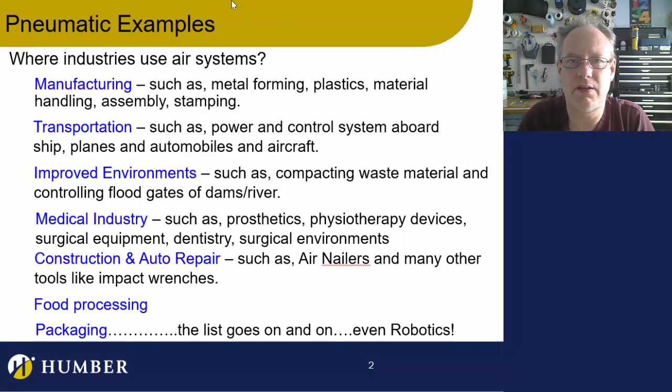When we have precious environments, like situations where we're packaging food or special chemicals, we don't want an environment where we're going to add grease or electric shocks. We don't want to use electricity, anything with grease, or any motor that needs a bearing. Well, a lot of things need bearings, whether they have pneumatics or not. But often for purity, we use pneumatic systems for packaging special materials like food and chemicals or pharmaceuticals. So as we go on, you'll start to really realize how cool air is and how unique pneumatic actuators are, and why we can use them in certain places where we may not use other ones.

For instance, I remember years ago, way back when we got the compressor out, we were at the cottage drilling holes through the beams under the water. I went down there with an actual drill that ran on air. We had the compressor up on the shore. I didn't want to run an electric drill under the water, especially one that plugged into the wall. But air, no problem. It worked, and all we had to do was re-oil it, and then it just continued to work fine. So there's an environment underwater where we can use air.

Pretty cool. So what's going on is I need to get into a little bit of the physics of how all of this works, and we'll talk about gases and the dynamics. There's the physics word popping into this, and yeah, we will actually be studying physics - the physics of air as we go through this entire course.

So we know what a solid is. It's got really strong interactive forces, so those molecules are bound together, stuck together. Now when we get into liquids, those molecules are also a lot closer together, but with a little bit weaker interaction. What happens is when we get beyond the fluid into the gaseous state, those van der Waals forces break down. Some of you may know what that is - don't worry, I'm not going to quiz you on what that means. But essentially, it's the molecular forces between the molecules.

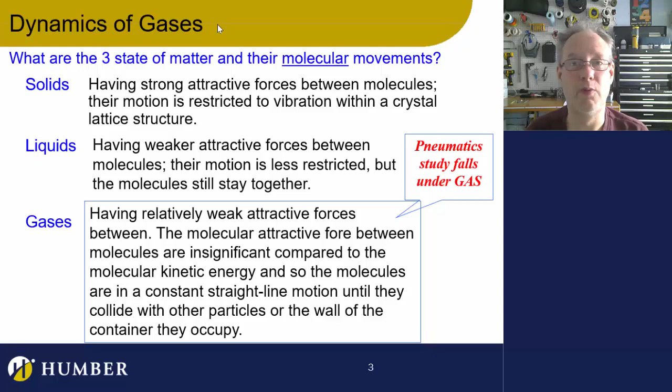Okay, let's move on. If we take a look at what an ideal gas is, an ideal gas is somewhere kind of beyond the solid that a gas is - actually, let me go back. Let me not even say that.

I'll pretend I didn't say that, although I'll kind of mention that again in a minute.

Let's talk about what an ideal gas is. An ideal gas is a situation where we have a gas in a closed container. If we don't have a closed container, we can't apply the laws that have been established for air. The physics, the rules, laws and formulas we use for gas are different than those we use for liquids or solids. But those formulas don't work unless all of that gas is stuck within a single container, enclosed.

To some small degree we can still use those laws in, let's say, a room. Like the room I'm in, there's a little air leaking through the door and window, the whole place isn't hermetically sealed. The gas laws still apply to a small degree, but ultimately the air in this room is not an ideal gas. If I were to hermetically seal this room perfectly, it would be an ideal gas. So an ideal gas is essentially a gas that's completely closed in some kind of environment, plus it's not completely compressed, more like a solid.

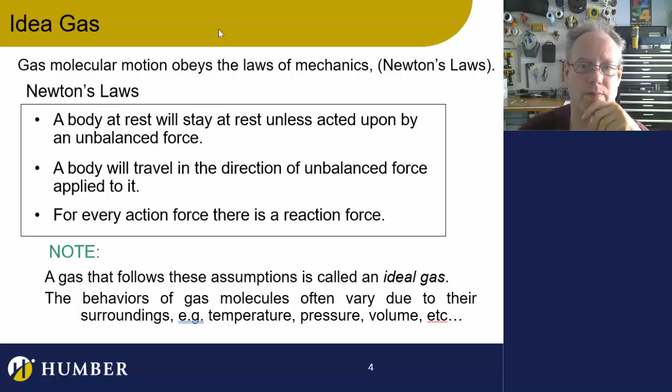What we've got here is the atmosphere. I want to talk about the atmosphere and atmospheric pressure, which you know about. What's actually the atmosphere? Essentially there are all these different levels of the atmosphere, and weather occurs way down at the bottom. As soon as we go above the weather zone, out of the troposphere, which is where the weather still exists...

Out of that we get into the stratosphere, which is getting closer to space, and as we go higher and higher we're eventually out into space, into the exosphere. It's interesting - even if you were to go out to the 100-kilometer limit, there's still a little bit of air out there. It's so thin, but it's still called an atmosphere. So there are all these different levels of atmosphere.

We're not really going to get into the details, but the only thing I need you to get from this is that as we go further and further up, the gas gets thinner and thinner. We'll talk about that in a couple slides when we unpack what atmospheric pressure is. Let's continue on.

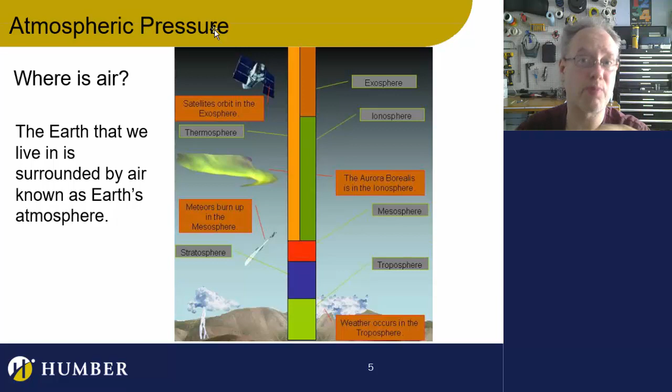So now, this is cool. I don't know if you guys knew this or not, but 78% of the air is nitrogen. Nitrogen's inert, you can breathe it. Obviously, I'm breathing it right now, and so are you. We're all breathing nitrogen. Now, nitrogen's got a little oxygen in it, right? So the oxygen is 21%. I think you guys know that generally the atmosphere has got about 21% oxygen in it.

Now, this is all at sea level. As soon as you start going way up, not only does the atmosphere get thinner and thinner, but the composition to some degree changes because of the buoyancy of these different gases. This is something we don't really need to deal with or know, because essentially we're going to be dealing with these ideal gases.

We're going to be dealing with pressures and systems that are generally on the Earth. We may be dealing with airplanes and stuff that go up into the air, and at some point we may discuss what the pressure systems may be in, say, the International Space Station. But essentially, there's still pressurized air in there. So whenever we're down near the surface of the Earth, we're dealing with pressurized air, and generally that pressurized air is going to sit in this ratio here.

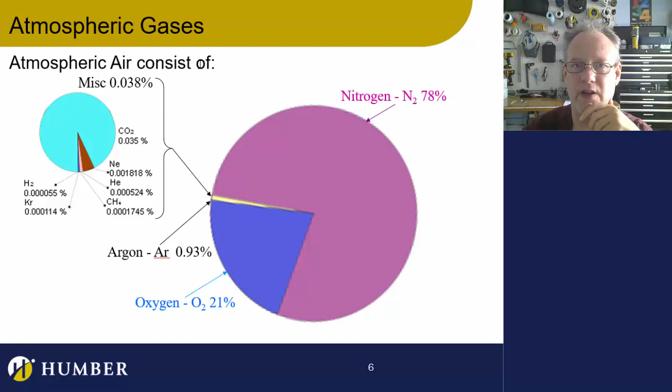It's going to be 78 to 21, and there are all these other little tiny things in between. But essentially, I just need you to get an understanding of what this looks like - what's the stuff that we're breathing, that we're living in, that we actually take and compress and do mechanical work with. So right now I just want a little bit of history of what's going on here.

The word pneuma, or pneumatics - like dynamics, kinematics, right, this is the study of motion. So essentially, pneuma is the Greek word for breath, and in some cases it's actually used for spirit, like the air or whatever. So pneuma is the Greek word or the definition of breath itself, and then we get into pneumatics. It's essentially pneumodynamics - the dynamics of air.

Okay, so that's fine. I like the word pneumodynamics, and I think it's actually a better name than pneumatics, because I like the word dynamics - it really talks about studying the physics of air, or breath, pneuma, right? Okay, so we know it's a branch of science that deals with the transmission of energy using gas.

Now, it's interesting, I'm just going to pause here for a second. Are we studying the transmission of energy? Well, yeah. What kind of energy? Actually, mechanical energy, truly. We're not going to be studying levers and stuff, but you'll see there's a parallel between some of the formulas we're going to study and the lever formula, and some other mechanical type formulas can kind of be seen in pneumatics to some degree. It's pretty cool - we're actually transmitting mechanical power.

So anywhere we're transmitting force through air, it's called pneumatics, because it's a dynamic of pneumo. So pneumodynamics - there you go.

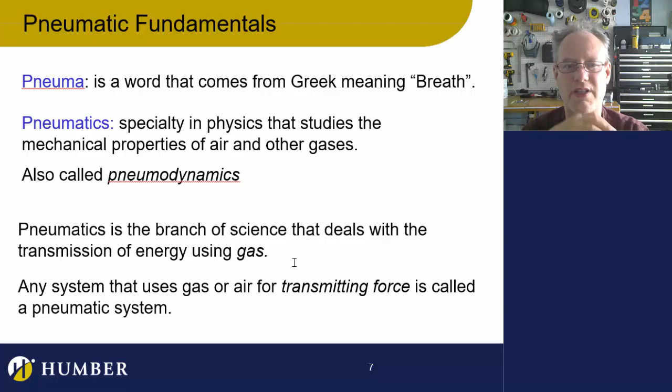So essentially what's going on is that we need to talk about two kinds of air. I've already talked about one kind of air - the atmosphere. I've said there's a particular kind of compartmentalization of that atmosphere where we have a certain amount of oxygen, a certain amount of nitrogen, a little argon, and a bunch of other things. Okay, so generally all of the air we're going to study is going to be like that.

Now, if I wanted to, I could apply the same rules, the same laws, the same math, the same physics, everything we're going to talk about with any other gas. I could use pure hydrogen, or, well, maybe I wouldn't want to deal with pure hydrogen, but certainly pure nitrogen or pure argon or any kind of inert gas, helium, stuff like that. So, but we're going to be generally dealing with pure pneumatic systems that are compressing air from the atmosphere. So as soon as we compress it, it turns from free air into compressed air.

Free air is just this, right? It's just this stuff here, that we're breathing, we're interacting with, we're walking through it.

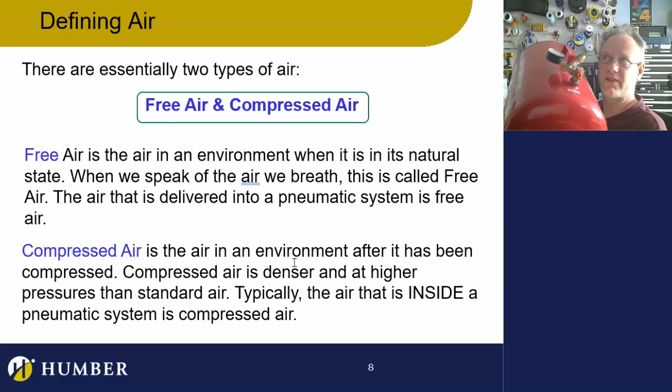As I'm moving my hands like this, I can feel the air. As I'm doing that, that's called free air. As soon as we compress it and shove it in a tank and capture it, so the density of the air in here, if it was compressed, would be greater than the density of air outside the tank. So I'm shoving more and more air in there. Actually, we can't make compressed air without an ideal gas, without that enclosed container.

So as soon as we compress it, it's no longer free air, it's compressed air. Again, it's got to be an ideal gas, it's got to be inside a container. And it's denser, so the density of that air in that tank is greater than the density outside the tank.

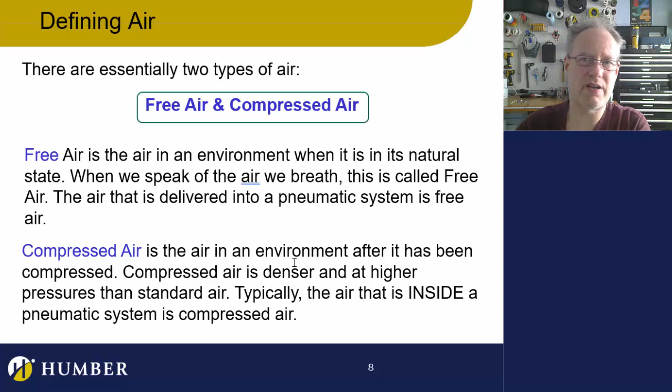Actually, I'll tell you this, if you really think about it, the atmospheric air, that's an interesting one. The atmospheric air is pressurized. Does it make sense? I mean, think about it. The atmospheric air is pressurized. Okay, why is it pressurized? Well, hold on to that thought. Let's just continue a little bit here.

So free air can actually be any temperature or any pressure and have any humidity, whatever. So we're going to talk about not just free air and compressed air, but we're going to get into defining what compressed air is, and maybe there are different terms for compressed air. But right now, let's just talk about this air that's sitting here.

So free air can be any temperature, any pressure, any humidity, whatever it is, it's called free air. Free air doesn't mean it's defined as anything. It doesn't have to be 21% oxygen and 78% nitrogen. It doesn't have to have a certain humidity. It doesn't have to have a certain pressure. It can be really low pressure. Actually, you could go up a mountain, way, way high, and the air pressure up there is really low, but it's still free air.

When we talk about standard air, we kind of have to put some values to it, because when we start to do the physics, we're assuming we're going to put free air into this tank. I'm going to compress air and put it in here. I have to kind of have a ballpark number for my physics, so I'm going to start with what I call standard air.

Now, standard air is just general. If you get really specific and you want exactly standard air, then it has to be exactly 14.7 pounds per square inch. And it also has to be exactly 68 degrees, or 20 degrees Celsius, and it has to be 36% relative humidity, exactly. So that's actually what standard air is.

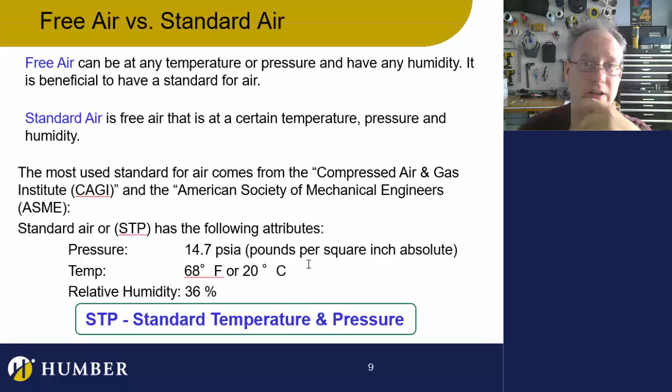Now, if you're in the desert, down in Death Valley, well, it's not actually standard pressure, but generally you're going to still use the same formulas. If you're up in Alberta somewhere 1,000 feet up, you're going to use the same formulas, but it's not exactly standard air. And if it's winter or summer, it's not going to exactly be standard air. But generally, it's something that we talk about as the type of air we use when doing the math for compressing. If we get into really specialized situations, like going up in an airplane or way up the top of a mountain, then we're not dealing with standard air, and the formulas change a little bit, but generally they're still pretty much the same. But right now we're just going to say, when we're talking about compressed air, we're talking about standard air, standard temperature and pressure, even though it's not exactly that, but we're just going to roll with that.

Now, as far as the compression of gas goes, taking a look at the history of this, we've got this cool concept of the bellows. I'm not sure if you've used a bellows, but I remember when I was a kid, we had one by the fireplace. You're actually kind of capturing the air inside and you're compressing it to some degree. It has a vent, it can come out, right?

So we're actually creating pressurized air. Now, the pressurized air inside that bellow, as I'm squeezing it down, there's a little bit of back force from all of it going out the nozzle. So there is some pressure generated inside, but generally the air that's in there is still not considered an ideal gas. So I'm not really dealing with an ideal gas, but we're talking about the history of pneumatics. At the beginning, blowguns go way, way back. But the bellow itself goes back hundreds and hundreds of years. So they weren't dealing with an ideal gas. It was pretty close. In this situation, we are actually compressing air to some degree in here, but it's coming out of the nozzle.

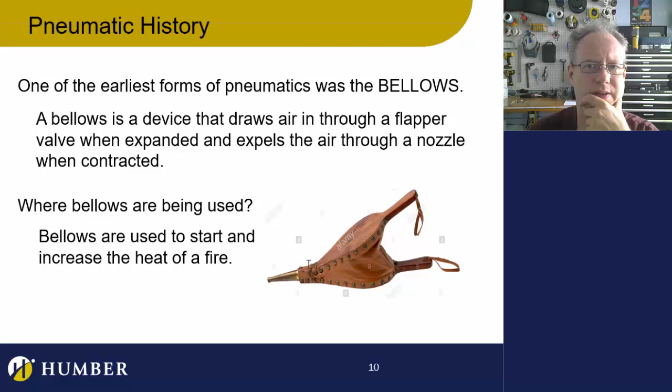But that was really the first compressor that we can think of. Now, if we go way back, blowguns were used way, way back when. They're compressing gas as well. Again, not dealing with an exact ideal gas, but still working with the ideas of pressurized gas. In this case, this is probably the first thing of pure mechanical transmission, or pneumodynamics. Pretty cool, because you're making a projectile go, right? So there's definitely pneumodynamics going on here. So it was pretty cool, actually.

It goes way back to the late 1800s, where France installed this huge compressor. I think it had to do with the water system in France. So they were pressurizing the water system to make it go around. But one of the things I do know about, which is pretty cool, which I'll show you a picture of...

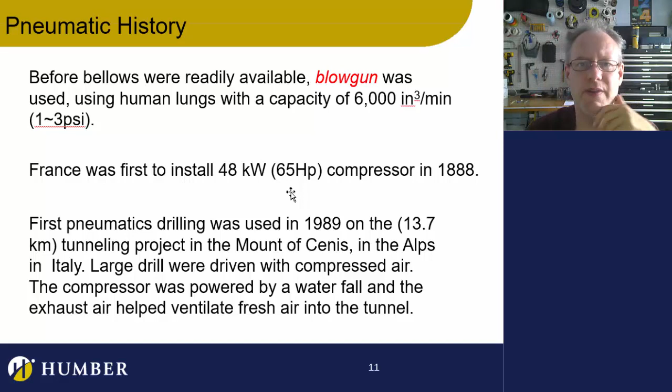...was the first pneumatic drilling, used way back when in Italy, when they were making this huge, I think 13.7-kilometer tunnel. It goes way into the mountains. It's pretty cool. What they did was, a gentleman designed this pneumatic drill. And I'll show you a picture of it.

So pneumatics, or pneumodynamics, like actual pneumatic systems doing mechanical work for us, have been around for a long time. It's pretty cool, going back to a little bit of the mechanical physics here. What they were doing is they were using waterfalls. Actually, there was a waterfall at either end of the tunnel. They were boring both ways, but there was a waterfall at one end, and the water falling, they used that to generate pressurized gas. So we're taking mechanical motion, turning it into more potential mechanical motion, pressurizing gas, and then having that go move drills. So it's pretty cool.

Ultimately, they were drilling the hole with water, but they were just transmitting the power, drilling this tunnel with the power of water, transmitting the mechanical force through pressurized air, or pneumodynamics. Super cool.

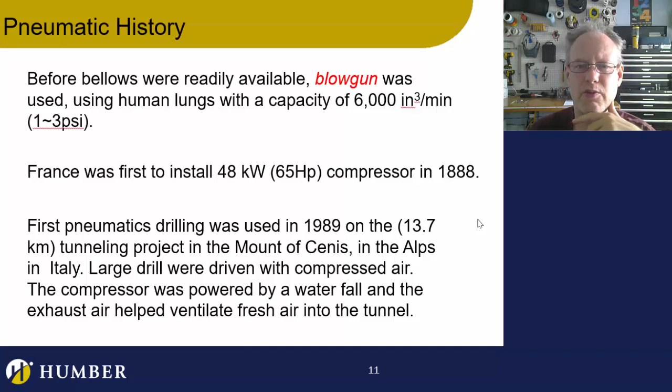So let's take a look at this. I need you to think about an example. I'm going to get my pneumatic actuator over here. And I'd like to talk about this particular example, but I need you to imagine something, because we're not in an actual classroom. But if we were, I think this might help a little bit.

So we're going to talk about the transmission of power. In some cases, when we have mechanical power, we actually have levers, belts, pulleys, cams and gears and stuff that are mechanically transmitting power from A to B. The same thing exists for electrical transmission, and we know that happens through a wire, some kind of conductor. Essentially, we're transmitting electrical energy or power through a wire, and the conduit in this case is a wire. I guess the conduit in a mechanical system is an actual gear or shaft or pulley or whatever the device itself is, transmitting the mechanical power.

Hydraulic systems, pretty cool, just like a pneumatic system, except they use pressurized fluid as opposed to pressurized air. And what's going on in this situation is that we have a pneumatic actuator, and I'm going to show you an example of this.

Hold on a second, I need you to look at this. Here's a pneumatic actuator, okay? So what's going on is if I've got my hose over here, I'm just going to grab this guy. I've got this hose. I'm not going to hook this up, but let's imagine this is a hose, a floppy hose, whatever. I can put 100 PSI through here, whatever that means, and it's a cool hose. Now I've got my actuator over here.

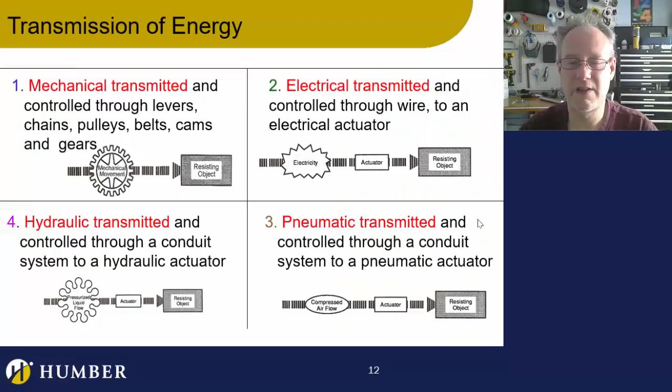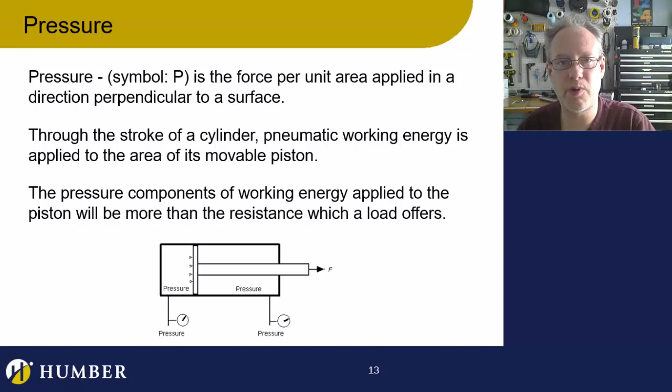So, actuators—we just talked about that actuator over there. You can imagine how it works. There's pressurized air that goes on the back, and depending on the area, that pressurized air is going to apply a certain amount of force. As long as whatever we're pushing against isn't pushing back more than the force the pressurized air creates, something's going to move. The basic principle makes a lot of sense.

Now, how do we measure this stuff? There are lots of different ways, some really accurate, some not. When we get into the small electronic type measurement, we have things like this—little electronic pressure sensors.

Essentially what's going on here is there's a little diaphragm that gets pushed this way or that way against the atmospheric pressure. This is studying the differential between the atmospheric pressure and the pressure coming out of this hose connected to a pressure vessel.

The other thing we can use is a Bourdon gauge, a pretty common type of gauge. Here it is—I found the one I ripped apart, so I'm going to undo it for you. Just give me a sec. These screws in the back, and there's a housing here. You'll see it's actually pretty cool.

This, again, is a differential gauge, studying the difference between the atmosphere outside and the atmosphere inside whatever it's hooked up to. Here we go—this is pretty cool. Here's the gauge, right? There's this meter thing that spins. And watch this—essentially what's going on is this is an NPT thread, National Pipe Thread. We'll talk about NPTs a little bit later.

So this is put inside a vessel. That air pig I had, this air vessel here, you can see there's a Bourdon gauge on here as well. That gauge goes up to probably 120. What does it go up to? It goes up to 160.

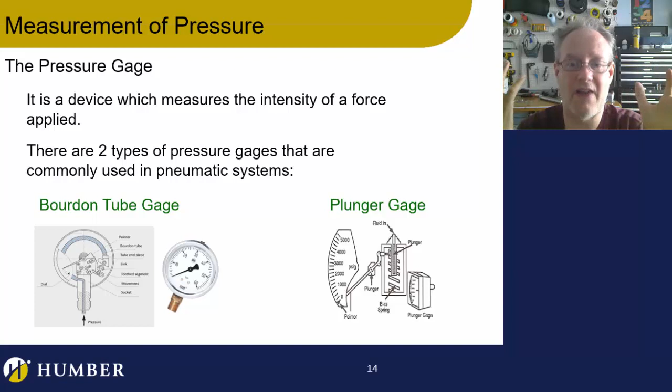So plunger gauges can deal with much higher pressures, 500 to 5,000 psi G. Now, when I say G in psi, I'll get to that, just bear with me, there's actually kind of a difference, but there kind of isn't. Let's just roll with this. When we're dealing with Bourdon gauges, usually they're under 500 psi. When we're dealing with over 500 psi, we're dealing with a plunger gauge.

Plunger gauges can't sense small changes. If you were to look at a plunger gauge and the pressure changed 2 or 3 psi, you wouldn't see it move because the scale is so big. It's kind of like, can you see the minutes of an hour go by on the hour hand going from one to the other?

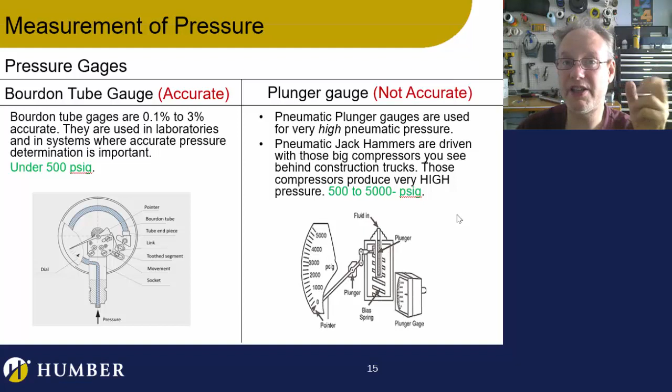No, but you can certainly see the seconds go by and then the minutes go by slowly. You can actually watch a minute hand if it's on a big clock. But what I'm saying is that Bourdon gauges are much more accurate at seeing really low pressure changes, differential pressure changes. The plunger gauges are dealing with really high psi, so you might see a change of 100 psi in a plunger gauge, but certainly you wouldn't see a change of 10.

Okay, cool. So let's go on to talk a little bit about formulation. This is our first formula that we're going to jump into. After this, we're going to take a look at different kinds of pressures and how we define what pressure is. Here, we're going to deal with the fact that force is pressure times area. We've talked about that when we studied Introduction to Controls together, where voltage and pressure are synonymous.

Pressure is measured in PSI, pounds per square inch. There are lots of other ways that we can measure it, but you may know pressure from a garden hose. You've dealt with water coming out of a garden hose, felt the water coming out, and understand the pressure. That concept can be used in pneumatics as well, because we're dealing with fluid power. Pneumatics is the study of fluid power, so we're dealing with the power of fluids. And yes, we actually consider air moving in a tube a fluid. It's pretty cool - even though it doesn't have the properties of a fluid, we still call it a fluid because it's fluid power.

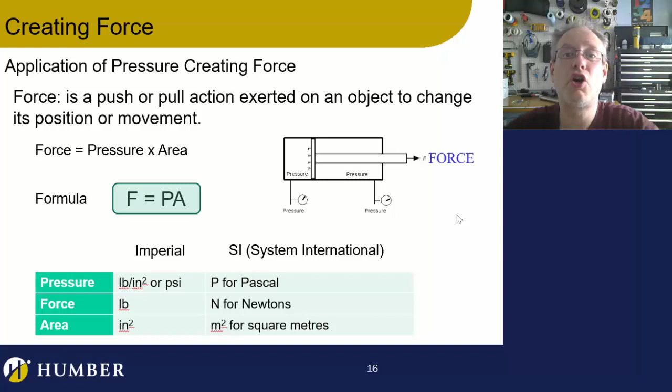So essentially there are lots of different ways to measure pressure. We're going to stick with pounds per square inch because we're dealing with the American industry, where in your career you're also most likely going to deal with metric parts. Like if you go with SMC, a manufacturer of pneumatic components, they use metric. We're going to be dealing with PSI because most of the systems we'll be working on are adopted from technologies from the United States, so it's all in PSI. For force we've got pounds, and area in square inches. Of course, in SI, the System International, force is in newtons and area is in meters squared. So if you come across that, you have to make note - you're going to have to do some conversions, because even though the math all works the same, we're just going to go through the math using imperial units.

So let's continue talking about pressure. Essentially, we're going to talk about three kinds of pressure. The first is atmospheric pressure, and then we'll talk about a couple other ways of measuring pressure. But essentially, what we're dealing with is an ideal gas to some degree - not really, but it is an enclosed space. Think about it - the atmosphere itself is an enclosed space. It's not quite as enclosed as, say, a pressure tank, but it is kind of enclosed.

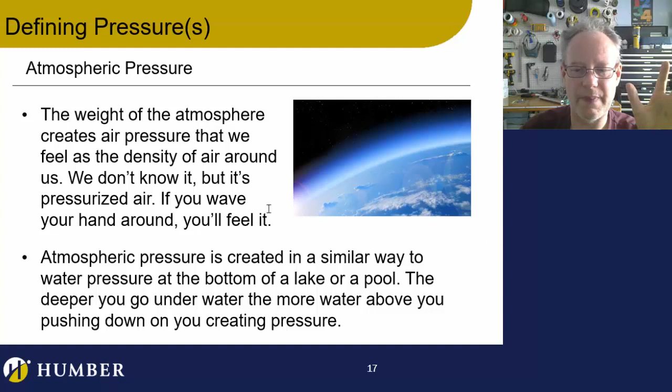The thing I'm trying to get to is the fact that the atmosphere is pressurized. You've heard of something called atmospheric pressure - so it's obviously pressurized. The atmosphere itself is this heavyweight gas coming down, and gravity makes it press down, very much like water. If you're at the bottom of a pool, you can feel the pressure there. So the weight of the atmosphere increases the pressure. And as we know, as we go from space down towards Earth, the density of the air increases as well. So it's very much like being at the bottom of a pool - as you go deeper and deeper, the pressure increases.

Now, this is really cool. I want to start with this concept. The reason the pressure exists, or another way of looking at it, is this: if you were to take a column of air that was 1 inch by 1 inch and take it all the way from sea level up to the edge of space - the very edge, as far as you can go, way out in the exosphere.

If you were to take all that air and compress it into a cube and measure it, or somehow put it on a scale, it would weigh 14.7 pounds. That's why atmospheric pressure is 14.7 pounds per square inch. Actually, it's because if you were to take a column of air, 1 square inch, and go all the way up to the atmosphere and measure all that air, it would be 14.7 pounds.

So now we're experts on atmospheric pressure. There's that pressure that exists, like being at the bottom of a pool. You feel that in your ears if you've ever dove down deep into a lake or a pool. The deeper you go, the pressure increases, and if you go down to the bottom of the sea, it's ridiculously high pressure, because of the weight of all the water above. The atmosphere pressure is the same.

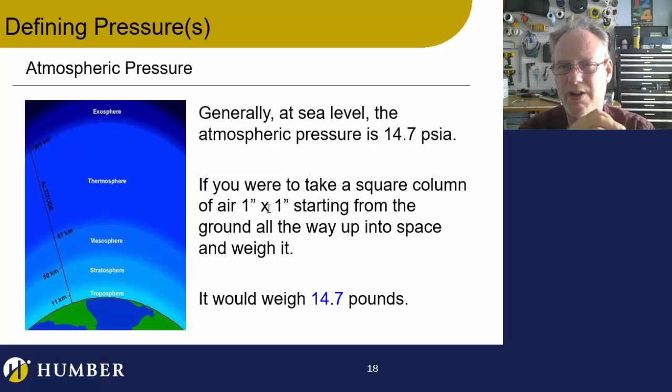Now, what I want to do is get into two different ways of measuring pressure. Whatever the pressure is, whether we're measuring the pressure of the atmosphere or the pressure inside an air tank or whatever it is, that red tank beside me, essentially what's going on is we've got two ways of measuring air.

One is called absolute pressure, and the other is called gauge pressure. Gauge pressure comes from a gauge, like a Bourdon gauge. Gauge pressure is a differential pressure. It's the difference between the atmosphere outside the enclosed vessel, outside that ideal gas, and the inside, which is the ideal gas itself. So that pressure inside, say, a tube, or on a motorcycle, or a bicycle, or a basketball, or an air mattress - you have pressurized air. I'm sure you've blown up a bicycle tire or something. You understand you're just shoving air in there, adding more and more air. You're taking atmospheric air that's already at a certain pressure and shoving it into an enclosed area, increasing the pressure.

So how do we measure that pressure? Well, we measure the gauge. Is the pressure inside different than the pressure outside? If we're shoving it in, yes. But the pressure outside the pressurized tank, or outside the pressurized ball or tire - is that air outside zero? Well, zero what? It's all relative, right? So I'm trying to highlight the fact that air pressure is all relative.

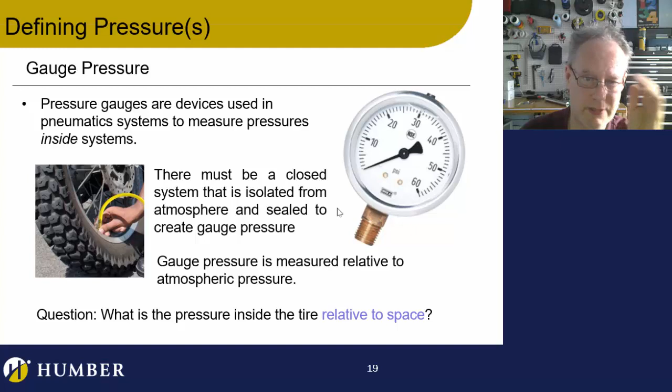Absolute pressure - we use it in situations when we're talking about flow characteristics for filters. Because the flow characteristic of a filter has to be studied in absolute pressure, since I'm going to study the pressure on one side and the pressure on the other side. If there's atmospheric differences, I'm going to get different flow rates, different pressures on either side, and they may not be consistent. So for flow dynamics, often we're using absolute pressure to study pressures on either side.

And when we're dealing with back pressure for flow analysis and measuring leaks and blockages, we deal with absolute pressures as well, because if the pressure outside a system is different on one side of the filter than the other, or one side of a tank versus the other, or one side of a line versus the other, like if I were to study the pressure differential on a line that went up and down over a mountain, I'm going to study absolute pressure.

If I deal with gauge pressure, I'm going to be dealing with the pressures in the atmosphere on a mountain and the pressure in the atmosphere in the prairie. It's going to be different.

So when we really want to deal with very accurate measurements, we deal with absolute pressure, especially when we're dealing with really low pressures. Like if I were to study the pressure of the atmosphere up a mountain, or the pressure of the atmosphere down at sea level, well, I'm dealing with absolute pressure no matter what. So absolute pressure is important for really accurate measurements.

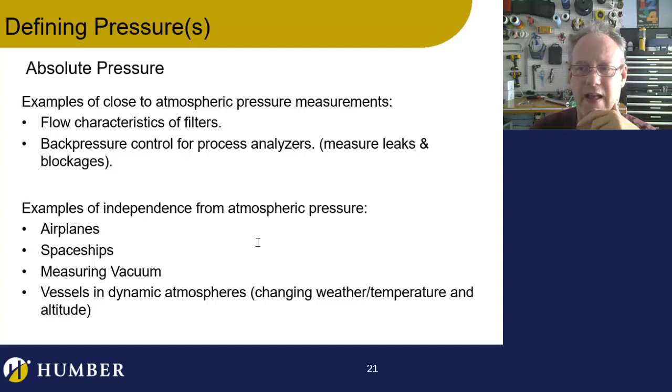Now this is kind of a cool example. This bag of chips was manufactured on the ground, okay? So there's a certain amount of air inside, and that air is actually atmospheric pressure. I mean, they might have actually pressurized the bag a little bit when they sealed it, but since it's not actually bloating, it's not pressurized air in there. It's actually 14.7 psi inside the bag of chips. Now again, the gauge pressure is 0 inside the bag of chips.

As soon as we take the chips on an airplane, the pressure in the airplane is decreasing. So what's going on here? Ever take a bag of chips on an airplane? If you haven't, dude, do it. It's so cool. Buy a bag of chips before you get to the airplane, take it, and it'll pop up. You have to do that because it's so cool.

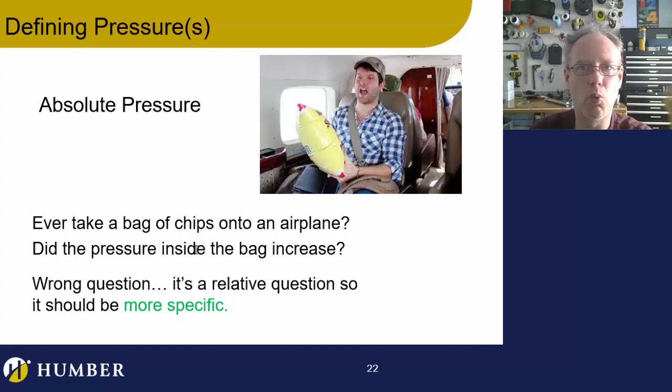So what's going on here is, if you ever take a bag of chips, did the pressure inside the bag increase? Remember I said there are two kinds of pressure: absolute pressure and gauge pressure. Two questions here: Did the pressure of the bag inside relative to the cabin air increase? Yes, it did. Did the pressure of the bag change relative to space? No, it didn't.

So essentially what's going on is that, going back to the concept of when we're measuring pressure, it's relative to something. Gauge pressure is relative to what atmosphere we're existing in. And absolute pressure is relative to vacuum or space.

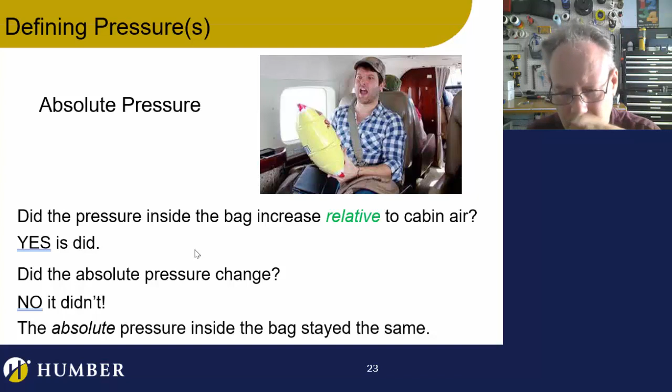So here we go, here's some formulas. I think you could have derived this formula yourself. Gauge pressure, atmospheric pressure, and absolute pressure are all kind of linked to each other. We know the atmospheric pressure changes to some degree, so the gauge pressure will also fluctuate depending on what the atmospheric pressure is, which we just talked about, taking my tank up a mountain or into space. But there's a formula where we can put them all together: absolute pressure equals gauge pressure plus atmospheric pressure.

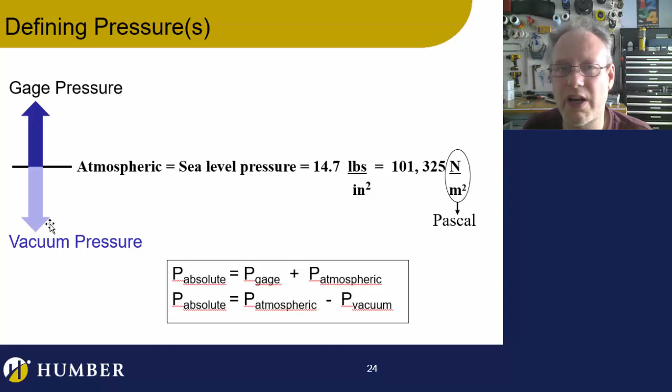As soon as we go below atmospheric pressure value, we get into something called vacuum pressure, which is really cool. We'll study vacuum pressures in-depth later on. So here's some pretty cool measurements, but this is where I get into the acronyms.

When we're measuring things in absolute pressure, like when we measure the atmosphere, or the pressures on either side of a filter when dealing with flow rates through filters, or doing very accurate scientific measurements of really low pressures, we're going to measure it in PSIA. We use the acronym PSIA because we're measuring absolute. Again, it's an acronym, not a unit.

I'm about to do some math without units, which is a little weird, but this is for you to practice wrapping your head around the three kinds of pressures you'll deal with: atmospheric, gauge, and absolute. Atmospheric pressure is measured in absolute. Gauge pressure is measured in PSIG, or we can just say PSI. So whenever you're absolutely, for sure dealing with absolute pressure, you use PSIA.

Anytime you're talking about gauge pressure, you use PSI. If you like, you can say PSIG too. But the only thing is, there are two types of measurement: one is absolute pressure, the other is gauge pressure. The acronym for absolute pressure is PSIA. The acronym for gauge pressure is PSI or PSIG. Either is fine. So if you just see something that says PSI, essentially you know it's PSIG.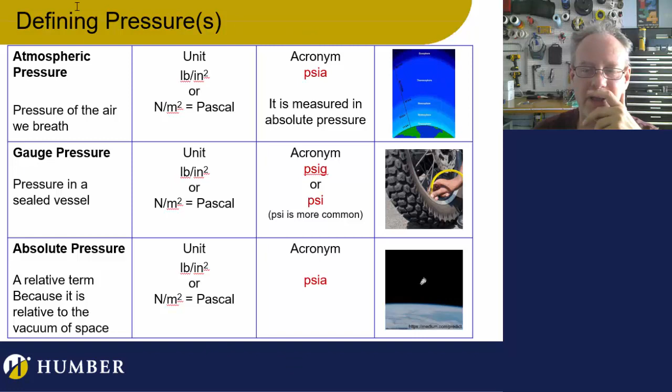So we're going to do a little bit of math, okay? What we've got is the same situation: we are calculating gauge pressure, absolute pressure, and then atmospheric pressure with the same situation. I've got a tank here. I want to know what the absolute pressure is, what the pressure in here is relative to space.

But all I have is gauge pressure, right? There's no absolute pressure gauge, although you can get absolute pressure readers, not gauges. Right now I don't have one, I just have to calculate it. I've got this, and I know what the atmospheric pressure is - somebody told me the atmospheric pressure is 14.69 psi-A, because we measure the atmosphere in absolute, since we're measuring it relative to space.

We also know that there's a gauge that says 10 psi, so that's relative to the atmospheric pressure - it's 10 more than the atmospheric pressure. So what's the absolute pressure? Well, that's easy, just do the math. Now watch this - I mean, this is simple math, but it's important to look at the acronyms.

Again, in this case, we're dealing with absolute pressure. Sorry, I wrote that, I was just editing this earlier, I'm going to take that out. PSI - okay, good, so I'm dealing with 10 PSI. I'm actually glad I did that just to highlight the fact that that is PSI because it's gauge pressure, right? It's not absolute pressure, it doesn't have that A there.

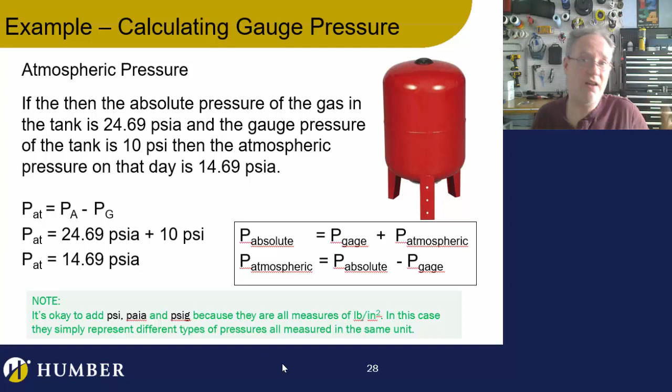In this example, we're looking for atmospheric pressure. Let's say I didn't know what the atmospheric pressure was, but I knew the absolute pressure in the tank. Someone just told me what it was, and I knew what the gauge said. So this thing gives me the difference between the pressure inside and the pressure outside. I'm looking for the pressure outside. I know what the absolute pressure is inside, and I know what this tells me. There's a formula I can use to find the difference, or find the pressure outside. It's just rearranging the formula. So my absolute pressure is measured in PSI-A, and this is PSI.

Now again, I've always told you guys, always do math with the units. In this case, you may be thinking, well, they're different units, so how can we add them? Dude, these are not units, these are acronyms, and I'm getting you guys to do this to get used to these acronyms. Essentially, all of this is in pounds per square inch, so it's the same unit. We can do this, I just need you to understand the acronyms.

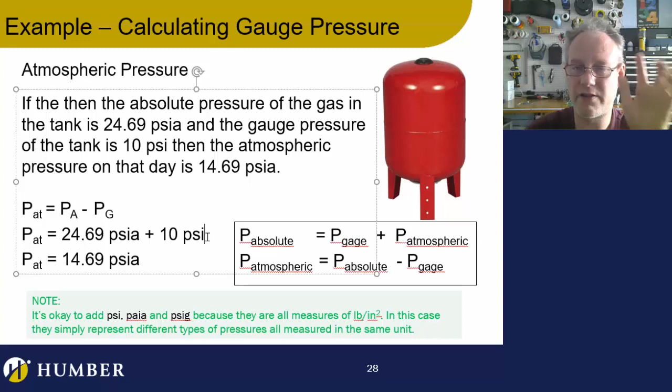It's a good example here because it tells you about what atmosphere is really doing and what atmospheric pressure is all about. In this situation, there's this airport way up in Tibet, high in Tibet, at 14,000 feet. It's the highest airport on the planet. So what's going on there is that, let's just say in the maintenance bay, there's a compressor with a reservoir tank. You've probably seen a compressor, actually, on this next slide there's a tank.

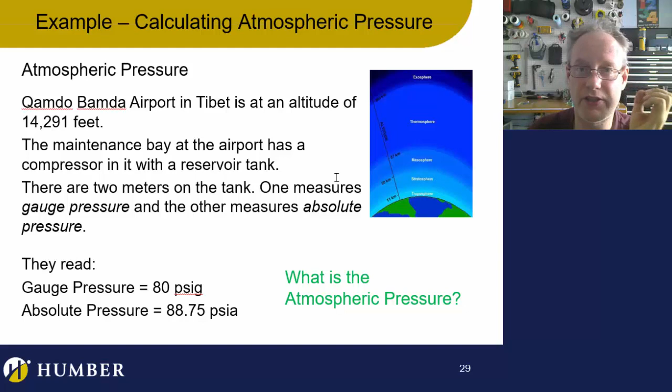So what's going on is there's a meter on the tank, and the meter shows 80 PSI-G. That's what it shows. Now also there's another gauge that reads absolute pressure. So you can use the math to calculate the difference, and now you can find that the atmospheric pressure way up at 14,000 feet is actually so small. Compare that to what you're used to living at, 14.7 PSI. It's almost hard to imagine, but people breathe and live and work up there. It's actually quite remarkable that they do that. But you could probably feel the difference waving your hand.

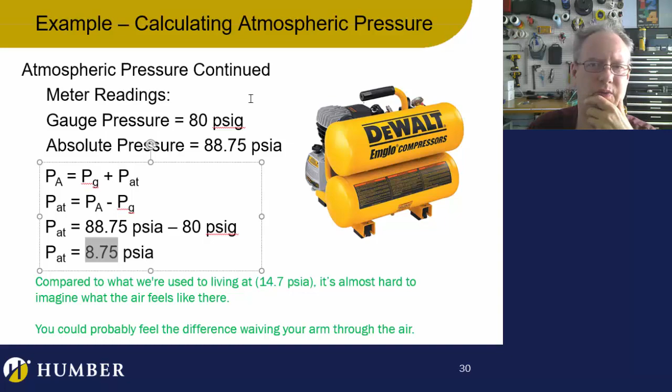Now to end this, okay, we're done. I just need this to stick with you. I'm not kidding, we've been talking about mechanical power. Mechanical power is this thing that's pushing some other thing, but we're talking about air. I need you to do this, no kidding. If you don't do this, like I do in lecture, half my students do it and the other half don't, and I call them lame. You're not cool, you're not doing this. You've done this before, but feel it, dude. There's a physical sensation there. There's stuff here. Air's really cool, it's stuff. I need you to forget about the fact that you're just walking around in space. No, dude, you're walking around in air.